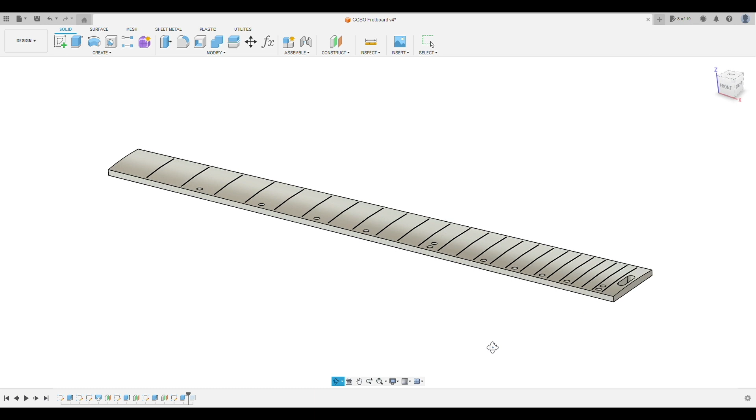The first thing is I designed it with a conical radius, or a compound radius as some manufacturers like to call it. On the narrow end of the fretboard at the nut, I have a nice round 10-inch radius, but it gradually transitions to a flatter 14-inch radius at the 24th fret. That's just a personal preference, but I feel like that makes for a fretboard that plays good all the way up and down the neck.

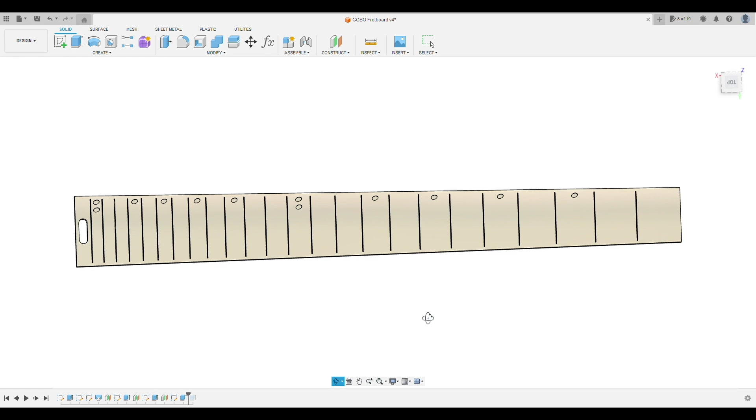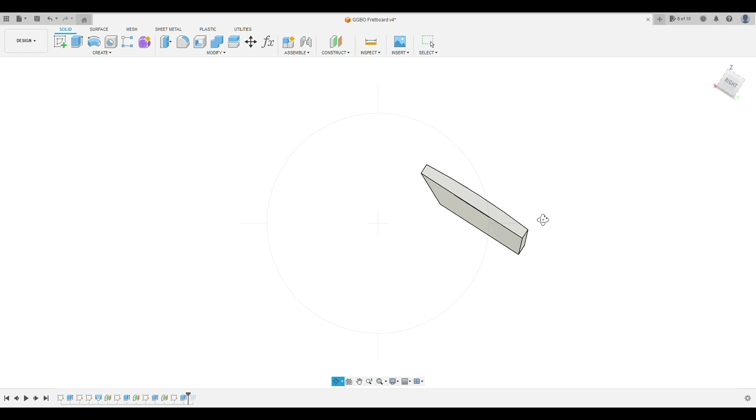As an added bonus, because of this dark magic called geometry, I'm able to design this fretboard with a consistent 1/4 inch thickness all the way along the crown of the fretboard without having the edges get narrower toward the wide end. The second thing is blind fret slots. I held the fret slots back about 1/10 of an inch from the edge of the fretboard, and that gives me a nice clean edge without having to bind the neck of the guitar. I'm one of those weirdos that only like bound necks on Les Pauls.

Now as for the inlays, I went back and forth for about 2 or 3 weeks trying to decide what I was going to do with the inlays. At one point in time, I had decided to do something kind of wild and crazy, but then I changed my mind because I want the redwood top to kind of be the focus of this guitar, and I don't want anything to detract from that. So I decided to keep the inlays simple. Now, not because it's easy, but sometimes in the right context, there's more beauty found in simplicity.

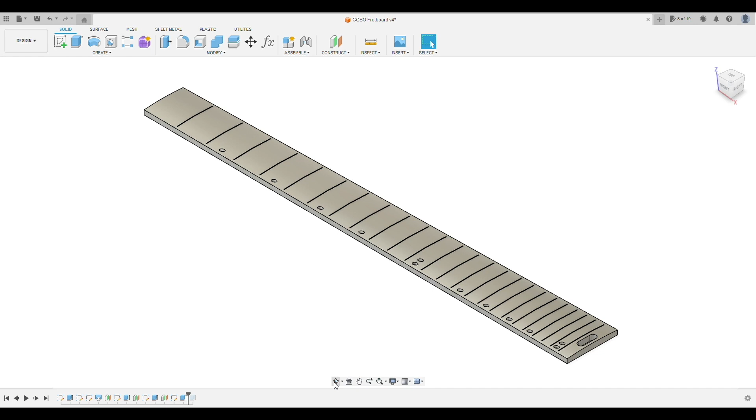If you look real close, you'll notice that these aren't just normal round dot inlays. They're ellipses that I've rotated 20 degrees off the center line axis. When all of that's machined out and filled in, they'll kind of look like little music notes on the fretboard. So, armed with a chunk of wood and a freshly minted CAD file, I'm off to my friend Brandon Roberts' machine shop, U Solutions.

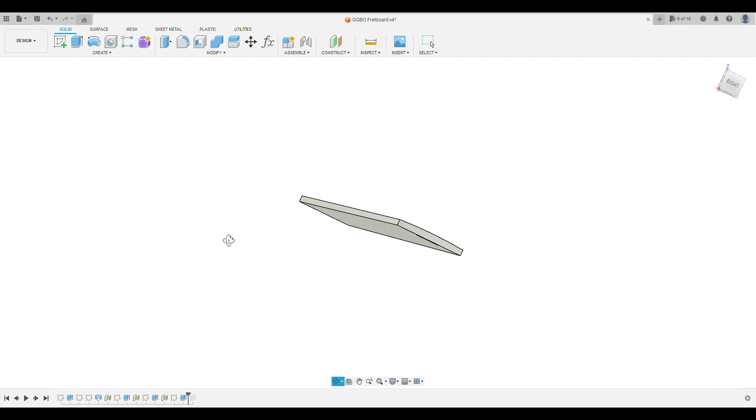Hey everybody, I am here at U Solutions with my friend Brandon, and this machine that you see behind me is just one of many CNCs that he has here in his shop, and this one happens to be the biggest. This is a Mazak VTC 20B. This thing's a giant, it's like 15,000 pounds. It will machine something almost 4 feet long and just about 2 feet square.

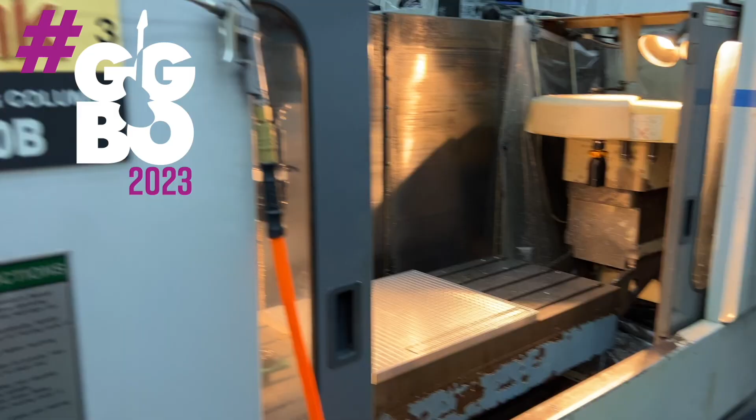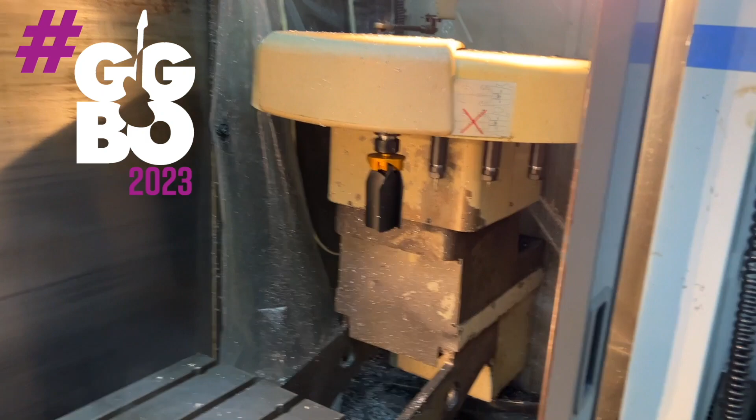So I'm going to turn the camera around here and get a shot of this. All right, so this thing is massive. It's probably about 15 feet long, probably about 12 feet deep. It can hold multiple tools with automatic change. This is a conveyor belt to get rid of the shavings. This thing is crazy, it is made to machine giant blocks of steel.

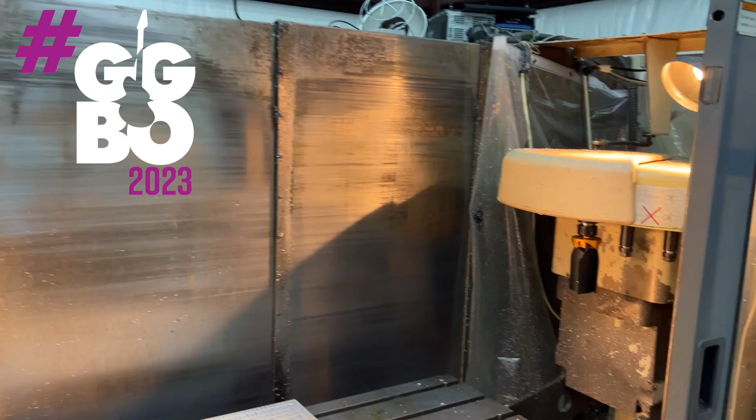And the reason that I'm showing you this is in a gross act of overkill, we're going to use this machine to cut out a fretboard. I'm not looking at the camera, dang it, got to look at the camera, it's up here. We're going to use this machine to cut out a fretboard just because we can.